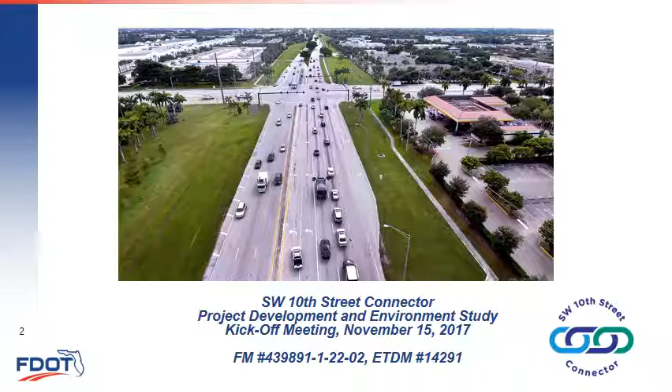Welcome to the kickoff meeting for the Southwest 10th Street Connector Project Development and Environment, or PD&E study. This project is being conducted by the Florida Department of Transportation under Financial Management Number 439891-1-22-02. Tonight we will discuss the Southwest 10th Street Connector PD&E study from the Turnpike Sawgrass Expressway to I-95.

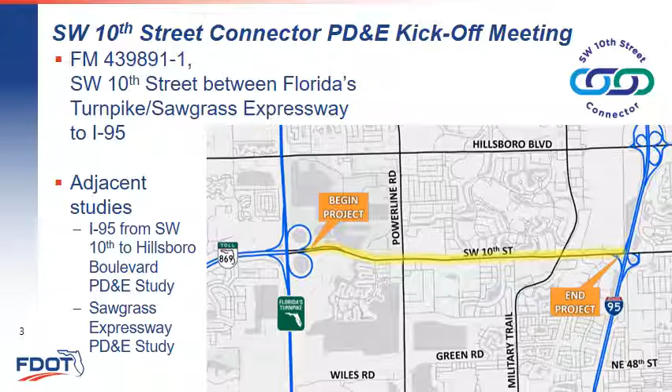While the adjacent I-95 and Sawgrass Expressway projects are being evaluated as separate studies, all three will be presented as one regional project encompassing the entire Southwest 10th Street corridor with connections to the Turnpike and I-95. Representatives from these adjacent projects are here tonight to answer any questions you may have relating to those specific studies.

This presentation will briefly review the Southwest 10th Street project history, the Metropolitan Planning Organization, or MPO, consensus study, activities that have occurred since the MPO consensus study, and describe the PD&E process and what will be evaluated as we proceed with the Southwest 10th Street Connector PD&E study.

Regional transportation planners recognized the need for improved transportation facilities in northern Broward County in the 1970s. In the early 1990s, FDOT completed a PD&E study to connect the Sawgrass to I-95 along Southwest 10th Street. The project was not advanced, however, mainly due to community concerns. In 2008, the Southwest 10th Street corridor underwent another feasibility study, but the project had little political or community support, and once again it was not prioritized.

Meanwhile, the traffic, safety, and operational issues along Southwest 10th Street continued to worsen. Realizing that some type of improvement was needed, the Broward MPO formed a consensus-building team in 2015. This consensus-building team was named the Community Oversight Advisory Team, or COAT, which consisted of 15 members from the cities of Deerfield Beach, Coconut Creek, Coral Springs, and Parkland. The team also received technical input from various county and FDOT representatives.

The COAT's purpose was to formulate a vision for the Southwest 10th Street corridor that was acceptable to the community. The COAT also compiled a list of 18 recommendations to be examined in the PD&E study. In order to continue the collaborative efforts, the FDOT has requested that the COAT members remain engaged during the PD&E study. The COAT's recommendations were formalized in a report and presented to the Broward MPO in 2016.

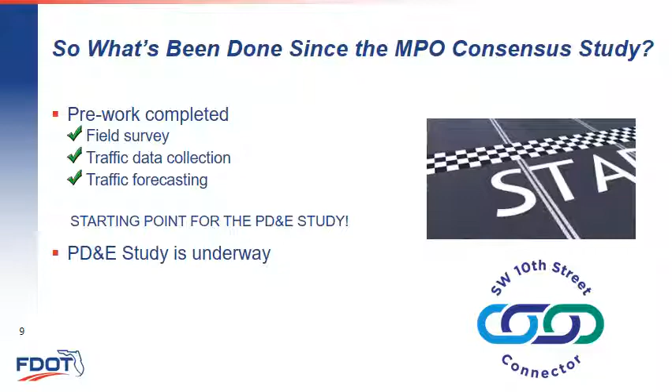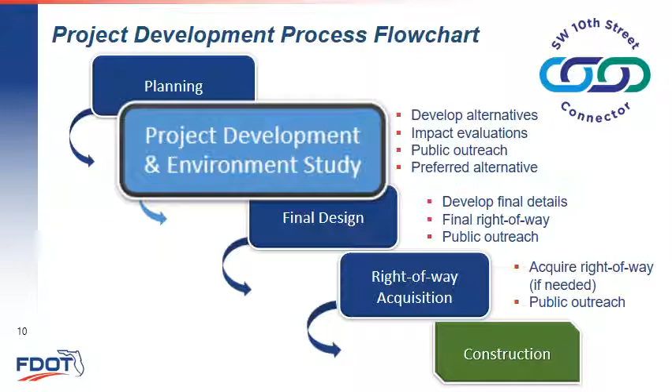A project development and environment study is the step after a planning study, but before a project enters into the design phase. A PD&E study must follow National Environmental Policy Act or NEPA requirements. During the PD&E study, all social, environmental, and engineering analyses are performed and documented regarding the proposed transportation improvement. These analyses will support decisions regarding basic design concepts and identify a preferred alternative.

Since a PD&E study is not a final design project, some elements are developed to a conceptual level of detail and must be further coordinated later in the design process. Public outreach is a very important component of a PD&E study and also supports the project recommendations.

A continuous community outreach process is integrated into every step of the project to ensure that corridor residents, businesses, the traveling public, and other interested parties have opportunities for participation and meaningful input throughout the PD&E study. There will be various opportunities for you to provide your feedback.

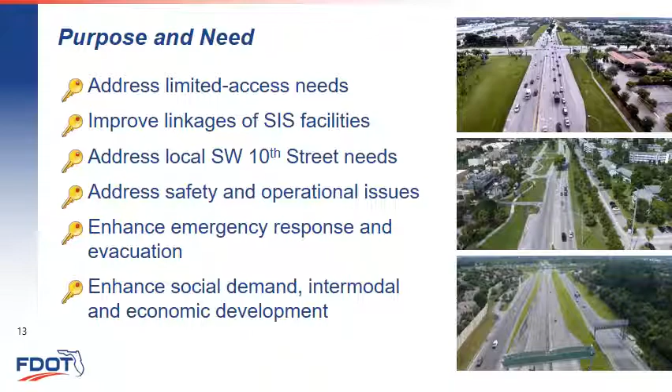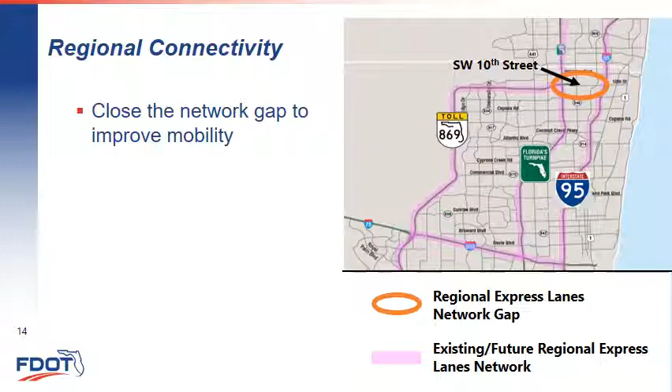The crash rate along the Southwest 10th Street corridor is higher than the state average. On average, there are 103 crashes with 105 injuries yearly. These crashes represent an economic loss of approximately $15 million per year. 3 intersections, Powerline Road, Southwest 24th Avenue, and Military Trail are on the state's high crash location list.

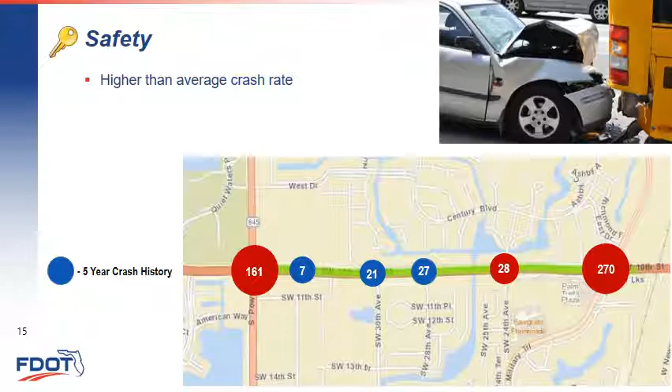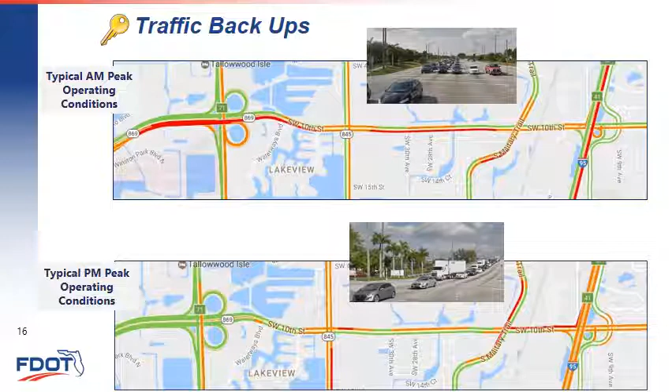Operational issues must also be addressed with any proposed improvement. Current traffic patterns indicate heavy eastbound traffic in the morning that backs up onto the Sawgrass Expressway. In the evening, westbound vehicles spill back onto I-95. Current level of service, or LOS, is measured from A to F, with A being the best or most efficient traffic flow, and F representing the worst traffic flow in congested conditions. The Southwest 10th Street corridor overall operates at an LOS of F.

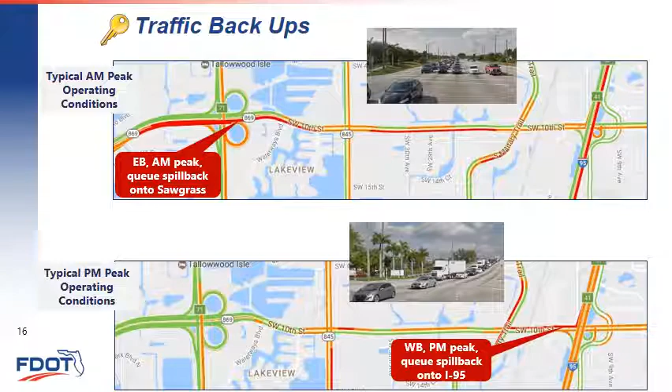There are operational issues at intersections along the corridor, and many of those intersections also operate at failing levels of service. The majority of the corridor currently carries approximately 50,000 vehicles per day and operates at LOS F. Traffic volumes along the corridor are predicted to increase, and the number of vehicles wanting to use the corridor, or traffic demand, is represented by the numbers in the orange boxes. If no improvements are made along Southwest 10th Street, the severe congestion along the corridor and surrounding roadways will continue to worsen.

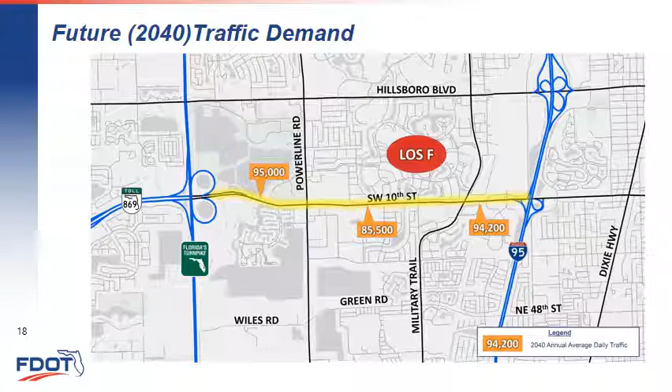All design alternatives will be developed and refined throughout the study process to meet the project's purpose and need and avoid or minimize impacts to the community and natural and physical environments while incorporating as many CAG recommendations as possible. The alternatives will be compared to each other in an evaluation matrix using common criteria such as community and environmental impacts, traffic operations, lifespan, and others to determine which alternative has the least impacts overall while providing the most long-term benefits for the communities. As part of any PD&E study, a no-action alternative will be evaluated and included in the matrix.

The team will evaluate 2 facilities within the Southwest 10th Street corridor. One will be an express lane facility to provide a connection between the Turnpike, Sawgrass Expressway, and I-95. Concepts will be evaluated with different entrance and exit ramp locations between Powerline Road and Military Trail for access to and from the express lanes and local Southwest 10th Street.

The extent of the below-grade section is being evaluated for the express lane facility and will continue to be developed as the study progresses. The other facility will be a local, lower-speed roadway to serve businesses and communities within the corridor. Bicycle lanes, sidewalks, and other community elements will be evaluated.

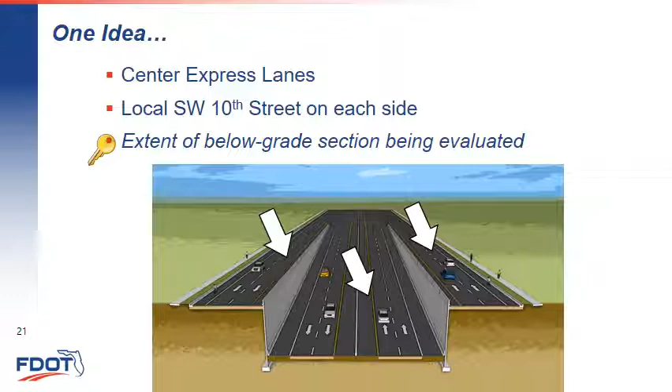Another concept under development is a northern express lane alignment. This concept locates the local Southwest 10th Street facility on the south side of the express lanes. This alternative is also being evaluated with a below-grade section.

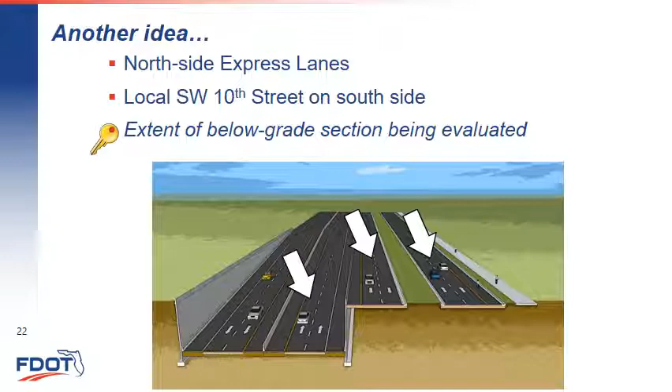Each build alternative will be evaluated as it relates to the natural, physical, cultural, and social environments, with the goal being to avoid or minimize impacts to these resources. Results of the analyses will be documented and reports prepared and available at a later date. Multimodal accommodations such as park and ride lots and transit will be taken into consideration during this study.

Noise is a key concern for the communities surrounding the corridor, and a robust noise analysis is being performed. There are 7 residential communities, 3 recreational sites, and 1 commercial site that are noise-sensitive areas. Noise levels will be measured at various locations along the corridor and an analysis performed for each of the concepts.

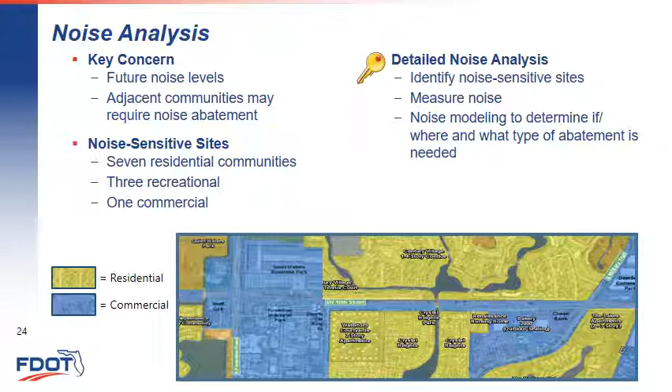Each alternative will be evaluated to determine if, where, and what type of noise barrier would be the most appropriate for the impacted areas. Noise walls, if required, will be closely coordinated with affected stakeholders.

The FDOT has already planned and funded 2 future landscape projects with ample budgets to address aesthetic elements along the corridor for installation immediately after construction of the roadway improvements. As the PD&E alternatives are developed, landscape design concepts will be developed and coordinated.

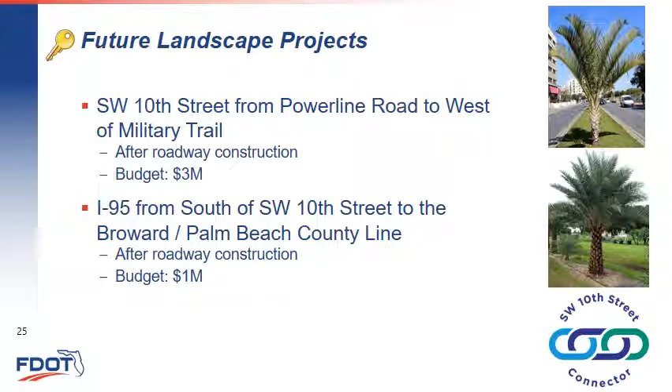Here is the schedule for the study. The Alternatives Public Workshop is currently scheduled for the spring of 2018. Additional details and plans for the concepts being evaluated will be available for review and comment at that meeting. The public hearing, where the FDOT will recommend a preferred alternative to move forward to the design phase, is tentatively scheduled for the end of 2018. Each of these meetings represents additional opportunities for you to offer feedback.

Location and Design Concept Acceptance, or LDCA, signifies the end of the PD&E phase and is scheduled for early 2019. Continuous public involvement is included in the PD&E process. As we move forward, alternatives will continue to be developed and refined, and environmental evaluations will be conducted. Public outreach will be continuous throughout the study, and interested groups are encouraged to contact the project team, who will be available for group meetings.

The team looks forward to meaningful stakeholder engagement during the PD&E process and welcomes all input. The Alternatives Public Workshop represents an additional opportunity for you to provide your input and feedback to the team on the engineering concepts being developed. The public hearing is another meeting where you can provide your comments.

This project is currently scheduled to begin the final design phase in the spring of 2019. Currently, construction funding is in 2025, but FDOT is working hard to advance funding to get this important connector constructed in order to complete the regional roadway network.